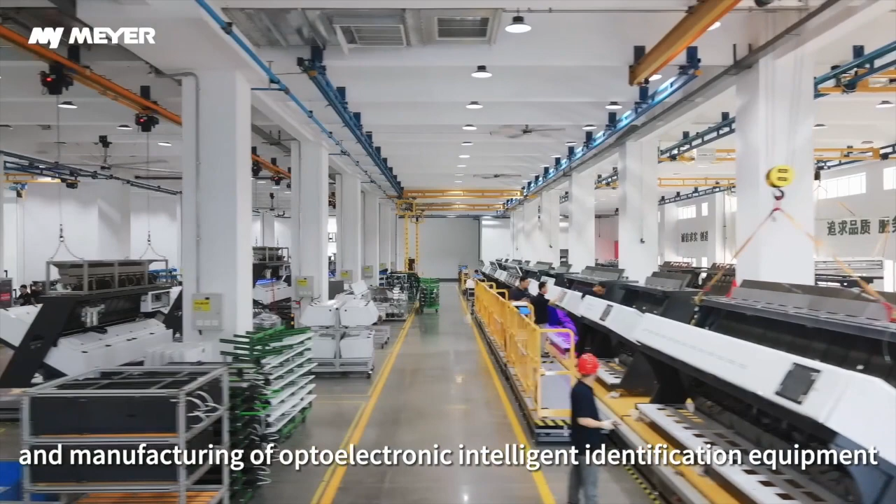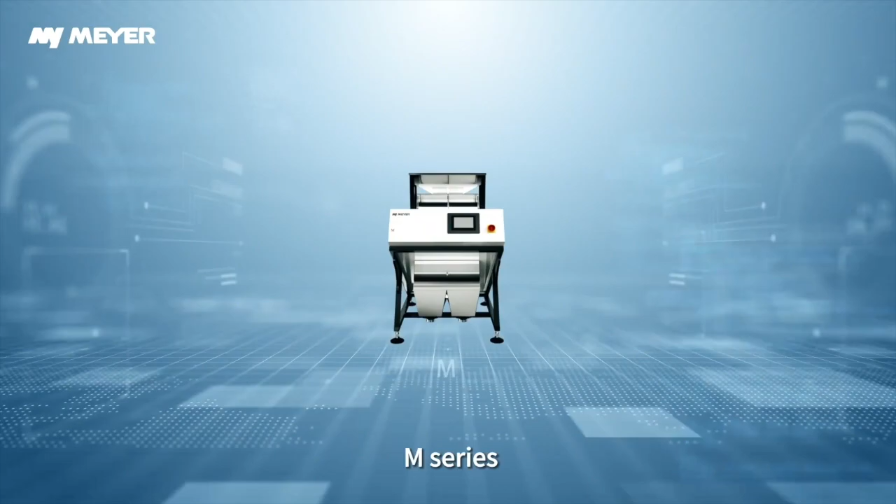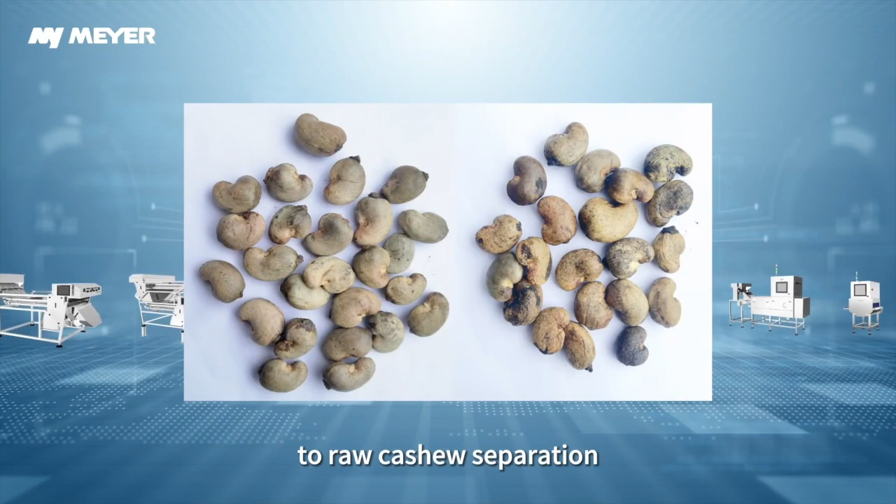MEYER is committed to applying intelligent identification technology to cashew sorting and processing by developing a full range of cashew color sorters, such as CF series, KM series, KF series, KFS3 series, K4 series, KS4 series, CGA series, M series, XS series, XM series, XL series, etc. The whole scene sorting solution can be provided for raw cashew separation, whole cashew separation, split separation, broken pieces separation, testa separation, scorched separation, medium spot separation, shell separation, foreign material separation, and so on.

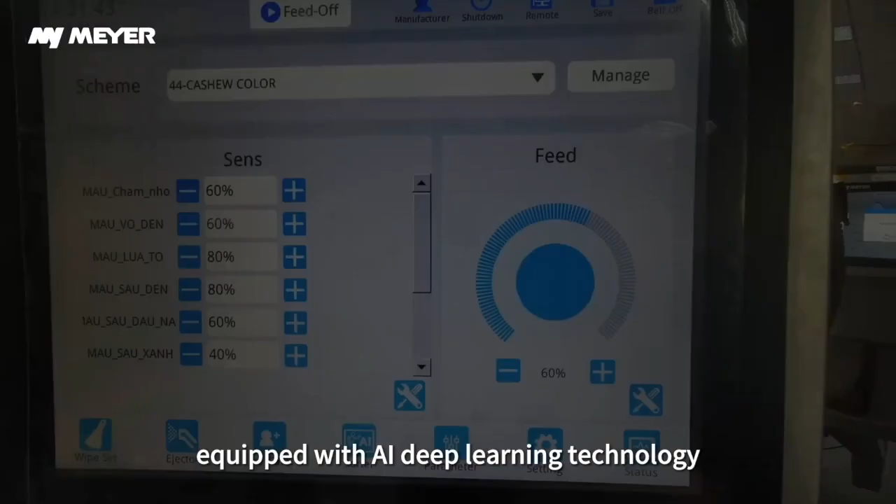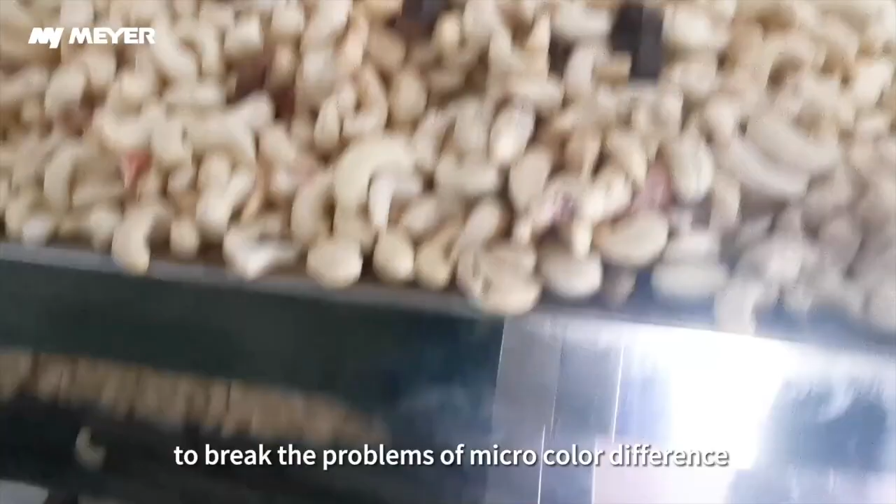MEYER's brand new cashew color sorter is equipped with AI deep learning technology. Based on massive cashew sorting data, it can quickly build and iterate deep learning sorting models to solve problems like micro-color difference, mold and spores, which are difficult to solve with traditional color sorters, significantly improving sorting efficiency for impurities such as single spot, multiple spot, micro-color difference, skin, insect spots, mold and wrinkled skin of cashew kernels.

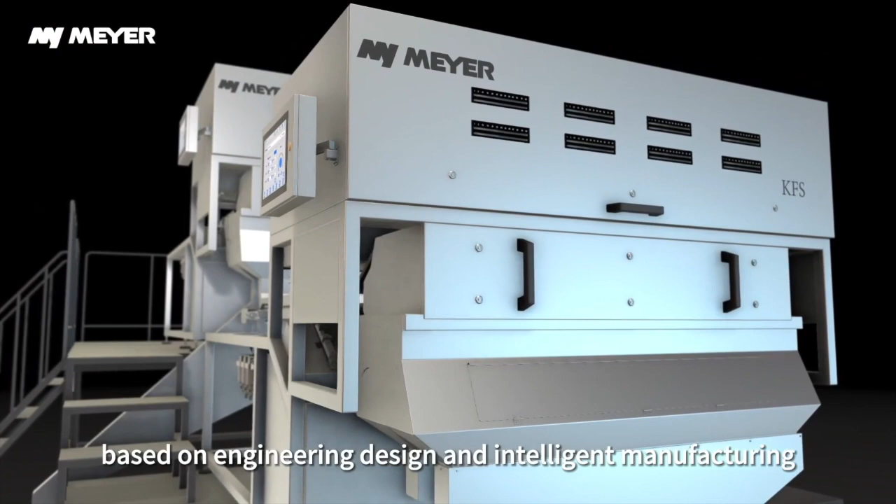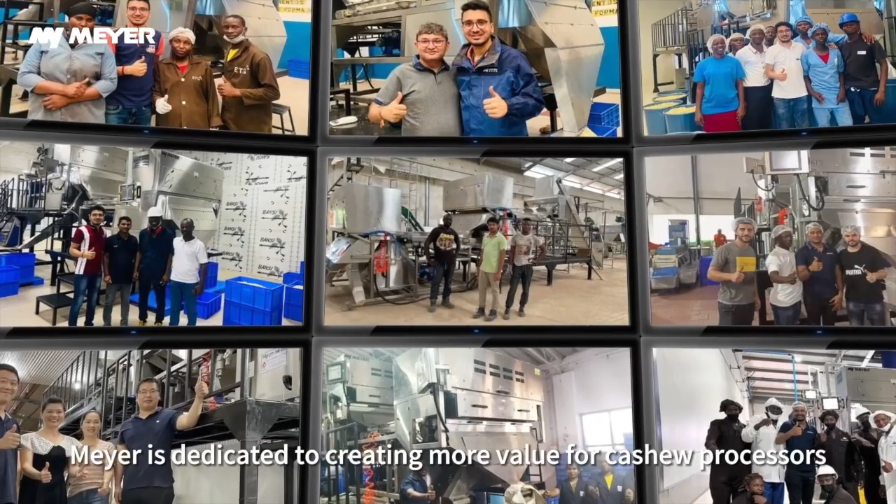Based on engineering design and intelligent manufacturing, the structure of the whole machine is highly standardized and modularized, which greatly enhances stability and reliability. MEYER is dedicated to creating more value for cashew processors.

Have a good stay in Cambodia. Thank you, Joe. Thanks a lot.

Can you imagine one machine replacing more than 250 employees? Sometimes we feel it's not right, but if you see how the industry has grown, how millions of farmers increased raw nut production, almost doubling it in the last 10 to 15 years, then you see the impact is really, really big. I remember when I used to be in processing in '94, '95, doing this job, I used to have 500 or 400 workers, and that's been replaced by one machine.

That was one of the obstacles we used to face to achieve food safety. It's not easy to really achieve food safety certifications when kernels are touched so many times by so many people. We used to have a lot of problems with E. coli because of the touch. These days, it's hard to see any type of claims from the market on E. coli, which is great. Thank you.

Before I invite the other speaker, I would like to ask, can you put on a video from Gayatri Industries? They are also one of the major turnkey suppliers of equipment, very innovative, and each day they come up with a sort of state-of-the-art type of plants. They are from India, and they also have a stall over there. Unfortunately, Mr. Shakti, I didn't see him here today. So let's see the video, and then we'll start with the...

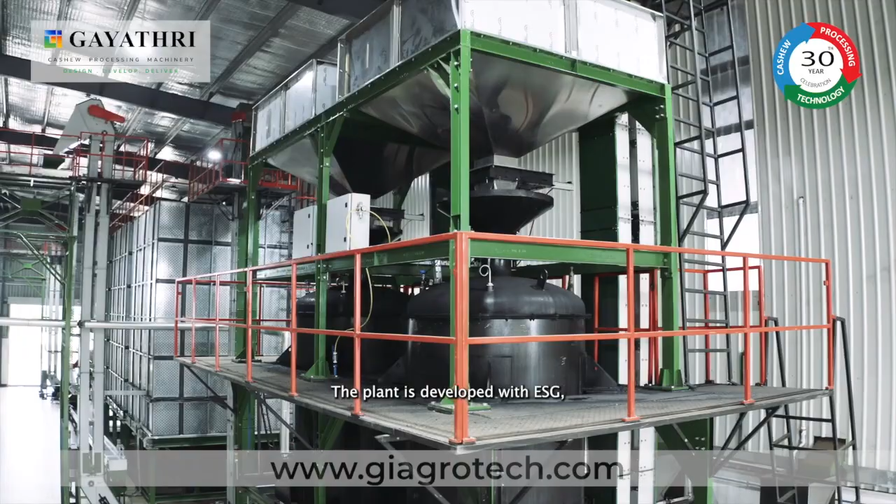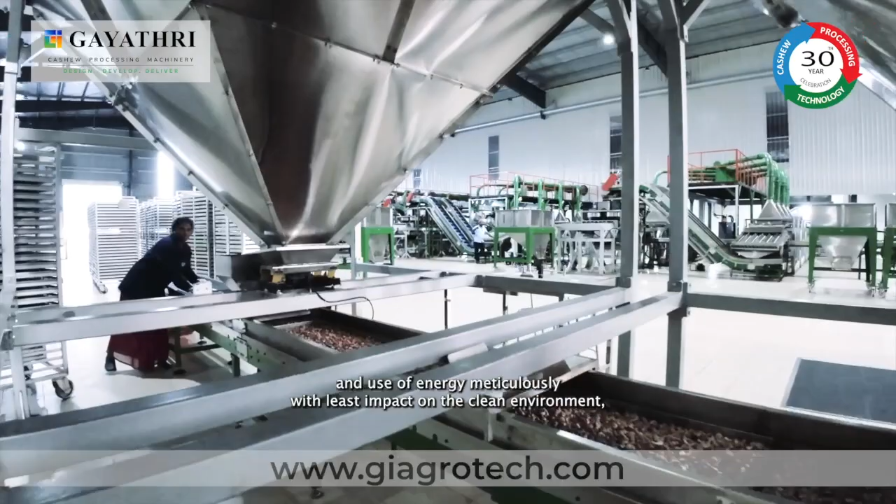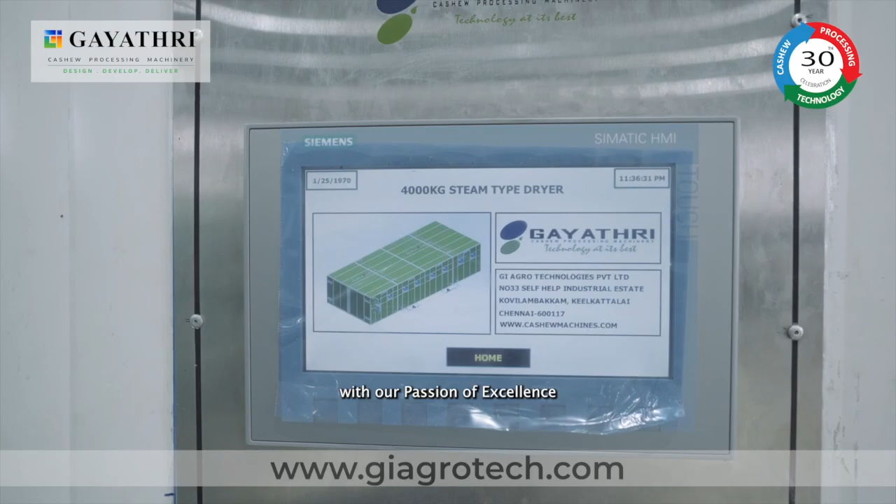Environment: by giving back to nature, air and water, and using energy meticulously with least impact on the clean environment. This is the basis of evaluating an organization's ethical behavioral performance. With our passion for excellence, we have set up a benchmark for the cashew industry worldwide to follow.

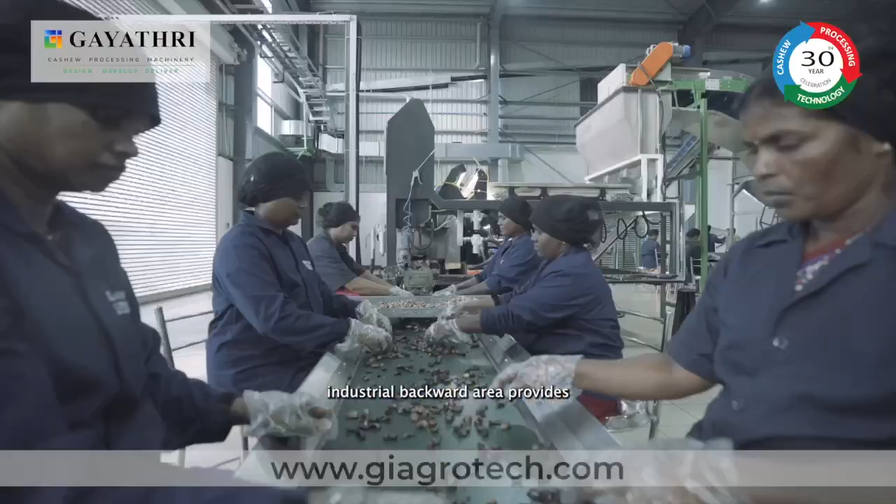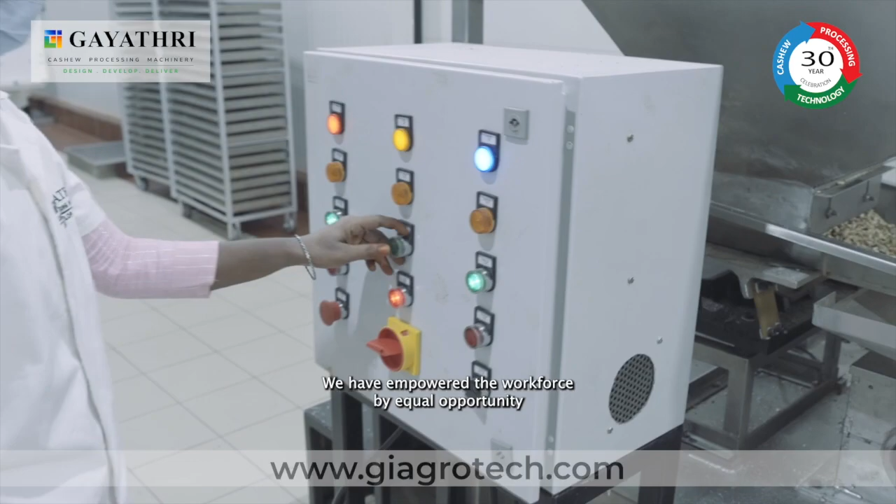Society: the plant, situated in a rural industrial backward area, provides direct employment to about 500 workers, unskilled women in particular. We have empowered the workforce with equal opportunity, training and job skills to become smart workers handling the latest technology in cashew processing, safely and securely.

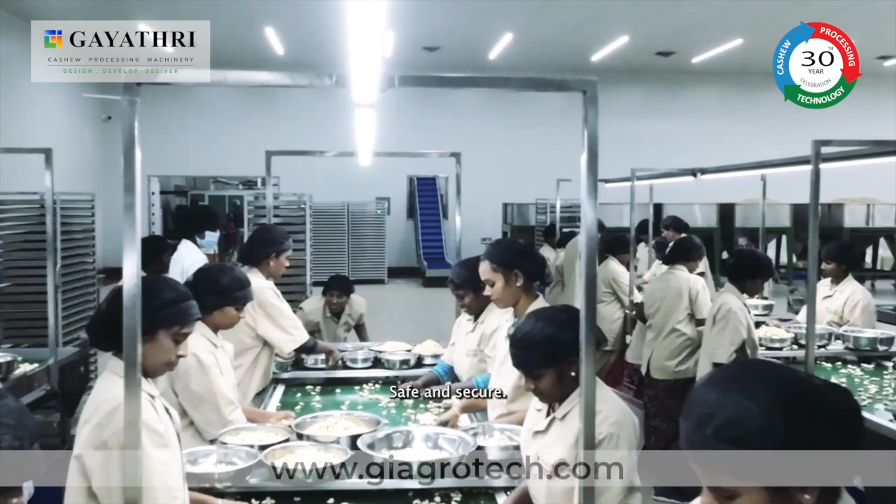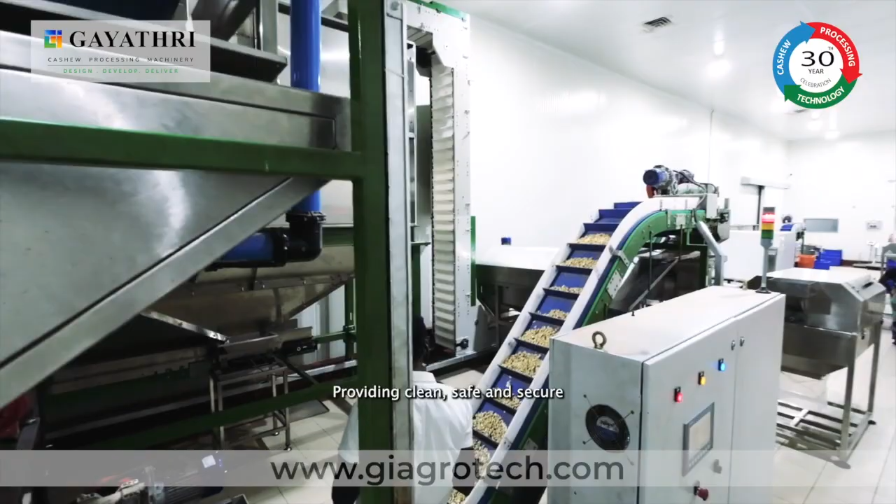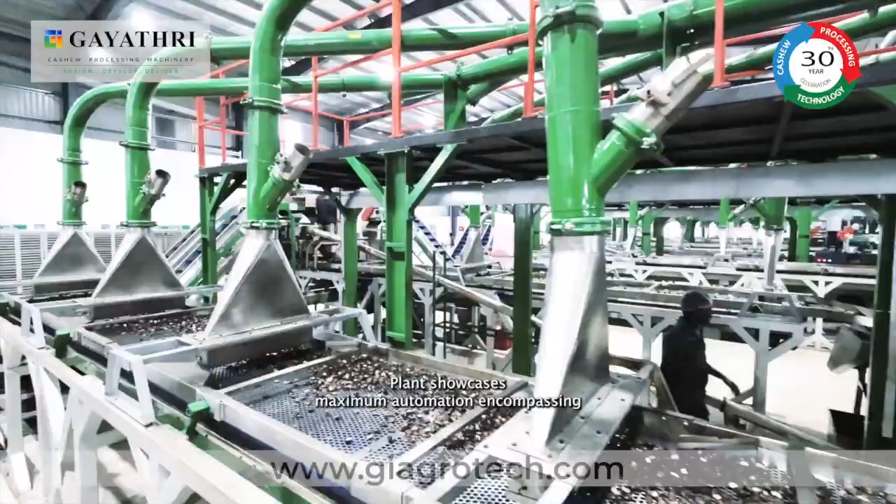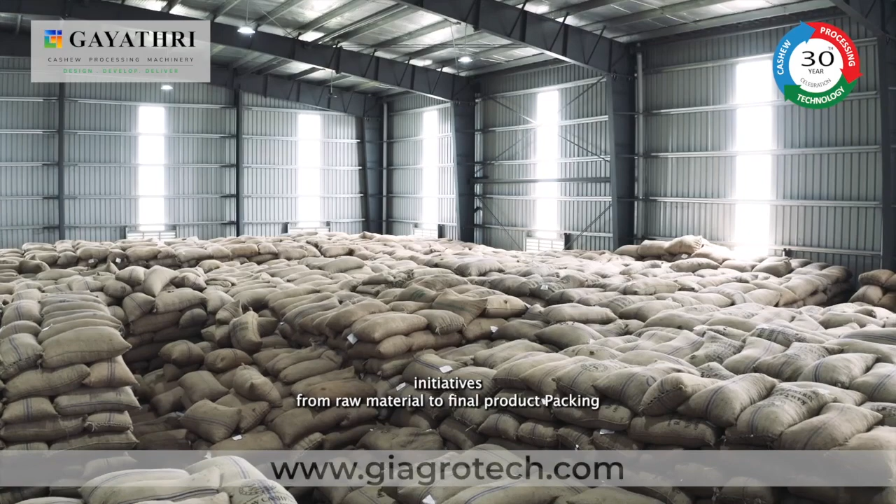Governance: meeting all legal and statutory rules of the government, equal pay for equal job, providing a clean, safe and secure working environment for workers. The plant showcases maximum automation encompassing HACCP and BRC standards, incorporating the latest global food safety initiatives from raw material to final product packing.

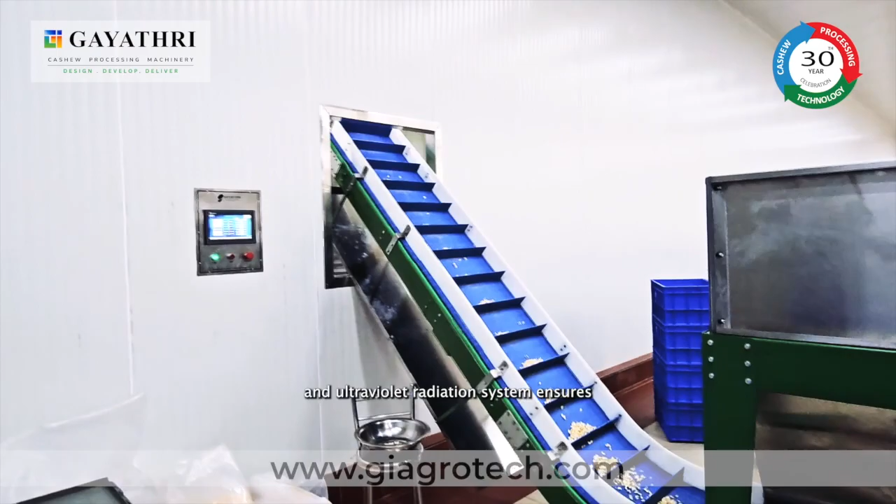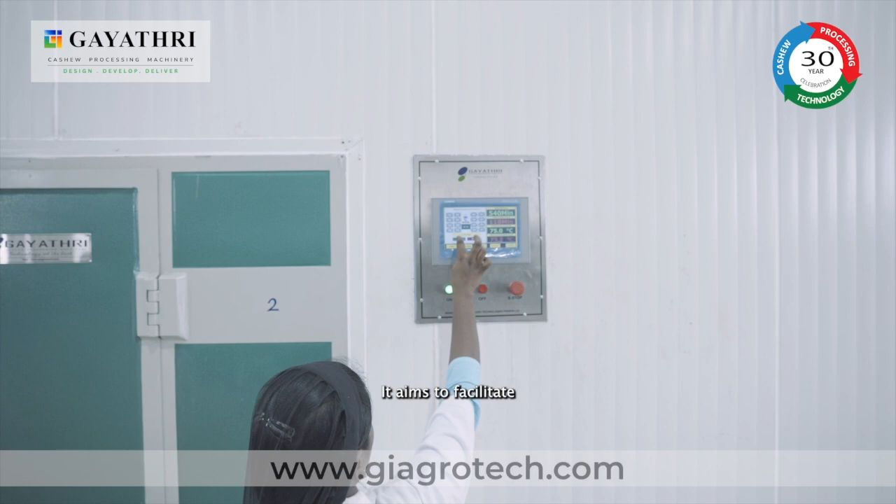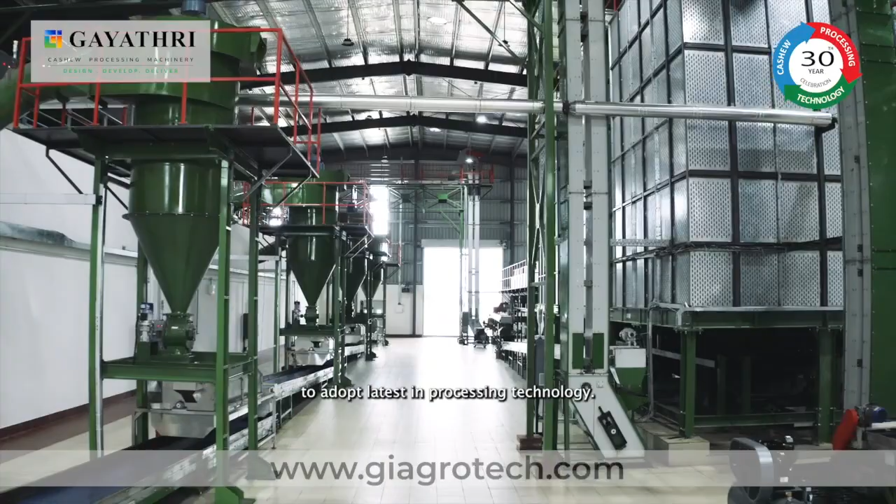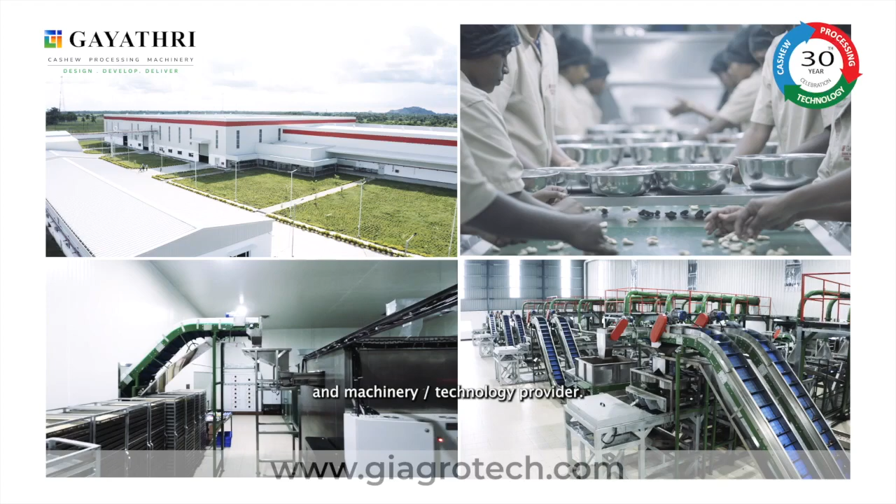This is a specific case where an equipment supplier thought like a cashew processor. The idea was that every day we do a lot of innovations, and sometimes these innovations work wonders, and sometimes they fail. So the idea was that we will not do innovation at the cost of a client. They try to do all the innovation within the plant, improvise their equipment, and only once they are satisfied do they launch that equipment—which is a great initiative.

In the past, the industry suffered a lot with new trials, especially from 2010, 2013 onwards till 2017. There was a lot of new equipment coming in and a lot of new versions coming in, and it wasn't always the case that the purchases were right.

These are the learnings which some of the equipment suppliers took into consideration. It's a great initiative. Now, from a category perspective, they are the champions in multi-grade grading systems. As the scale is increasing, a very normal operation scale these days is 50 tons per day, that's 15,000 metric tons per year, and that's the minimum for any emerging industry. There's still a need for a lot of people on the grading side, but some innovations in the last 7-8 years have seen these two champions bring equipment that cuts down manpower while enhancing efficiencies.

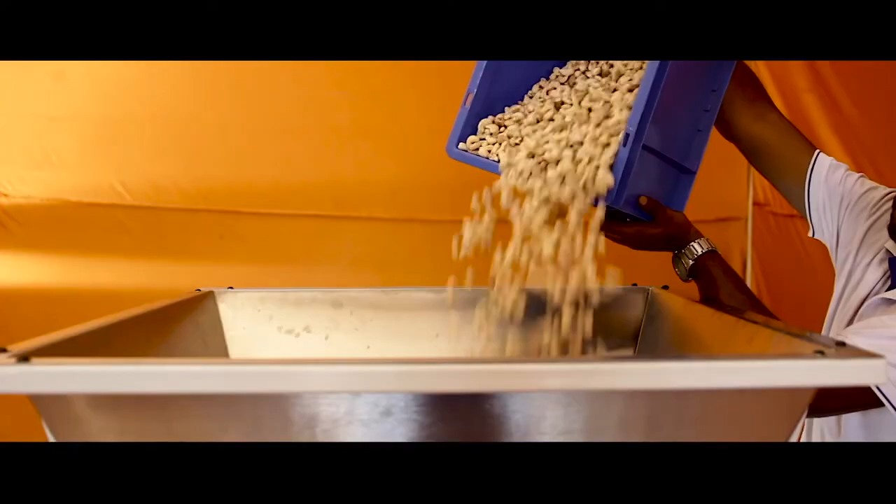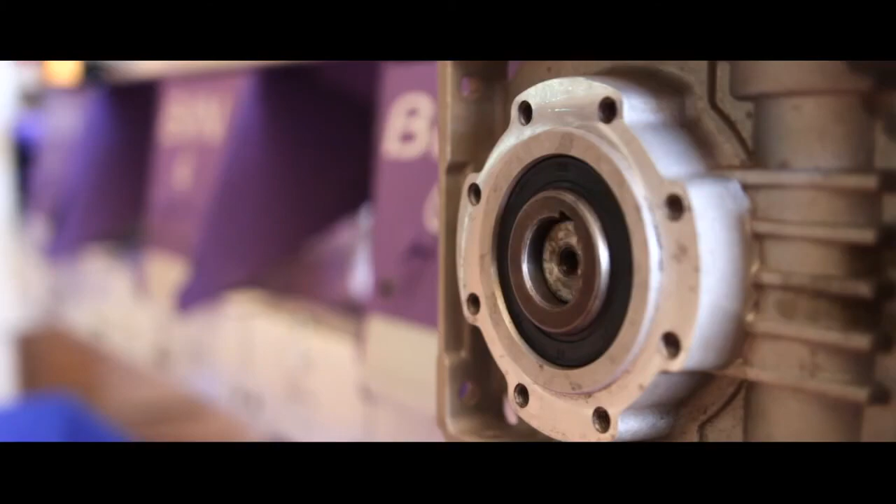As the name suggests, MAYUR is colorful and so is its behavior. Designed with customers' inputs and needs, nanoSorter MAYUR offers the right combination of speed and accuracy. It is powered by NanoVision, an indigenously developed vision technology dedicated to identify cashew nuts by size, color, shape and surface characteristics.

The possibilities with NanoVision are practically limitless, and that's the reason MAYUR gives you the power to grade and export directly from the peeling machine. Yes, you heard it right. Output from the peeling machine can now be directly graded and exported without any further inspection.

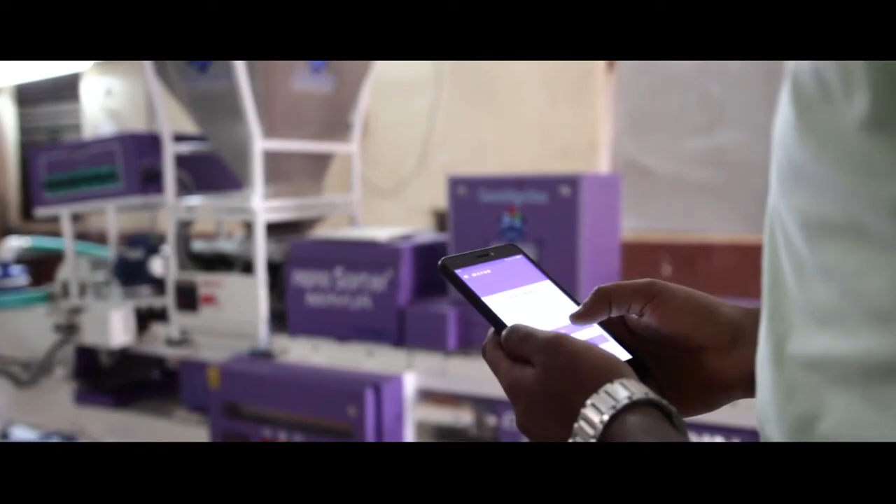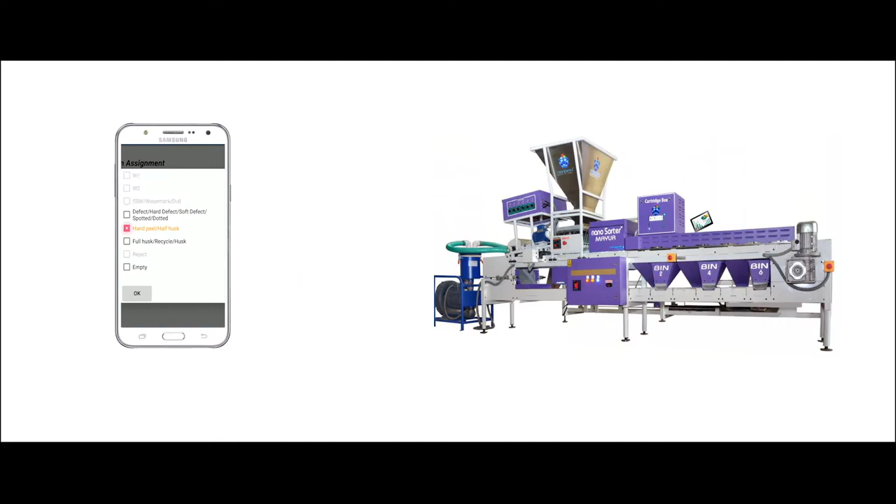The possibilities with MAYUR don't stop at that. You get an Android app with the machine which can be used to set the machine. As a user, you can modify the grades, which will help you customize the output as per your own unique needs.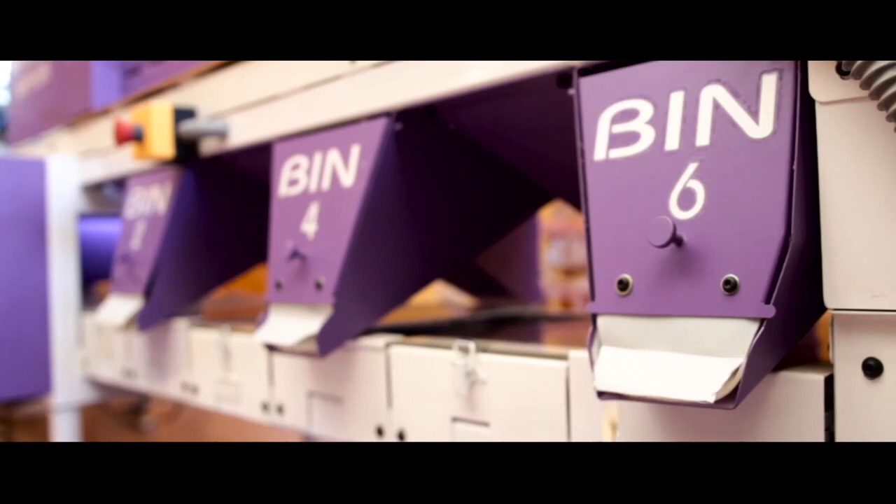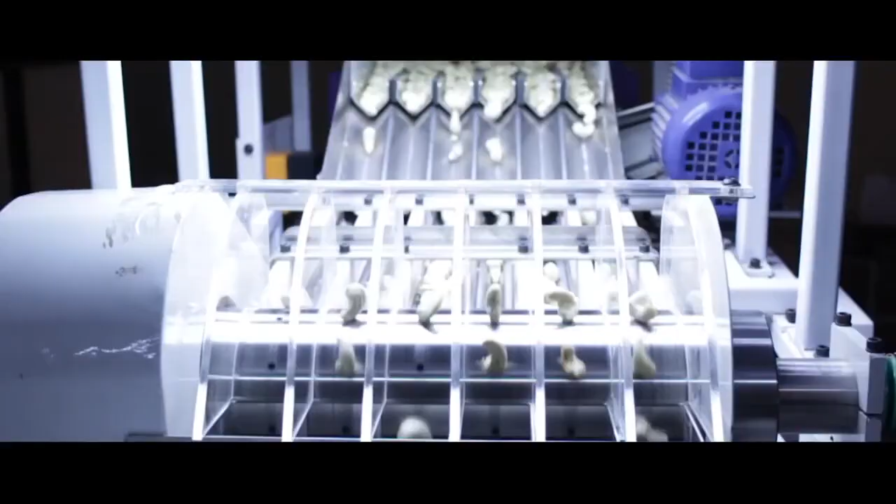MAYUR gives customizable 7 grades for size and color. With 200 kilograms per hour capacity, you can easily grade over 3 tons of cashews per day. The automatic feeding system of nanoSorter MAYUR, powered by NanoVision, helps unassisted high-efficiency feeding of cashew kernels to achieve throughput.

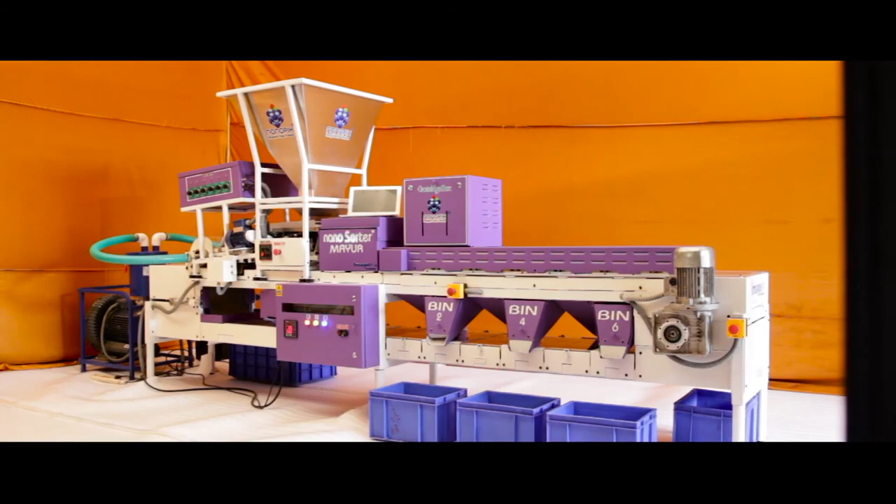nanoSorter MAYUR is truly the next generation grading machine in the industry. No more dependency on labor, no more grade inconsistency. One machine for all your grading needs. nanoSorter MAYUR by nanoPix. Imagine your future.

It's not about replacing some workers on the floor. It is more about providing consistency, providing value to your end customer, creating grades that are consistent across variations in your origin, variations in your processing, and then finally retaining significant value in the highest value bins and getting maximized profit. So the key takeaways from nanoSorter are high value retention in your high value bins, and you get more money for your produce.

We have 1,000 plus customers globally and expanding. 1,400 plus units globally in 10 plus countries, and we have about 12 years of experience doing this.

There are large factories running about 200 plus tons a day, like Arise, Bullock, Olam, who use our machines, and also customers who are very quality sensitive, like Kalbavi Cashews, Kamakshi Exports, Krishibal, who are very conscious about their quality and also use our machines. So it's not just about volume, it's also about quality simultaneously. And that's what we offer.

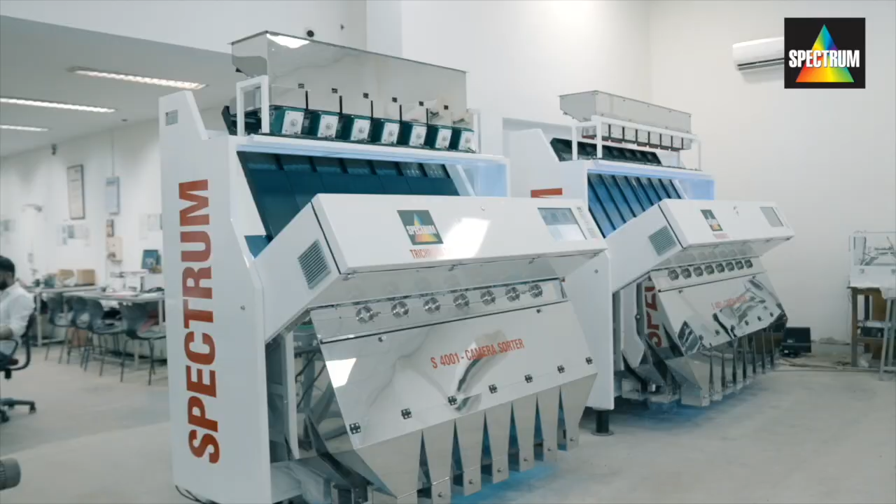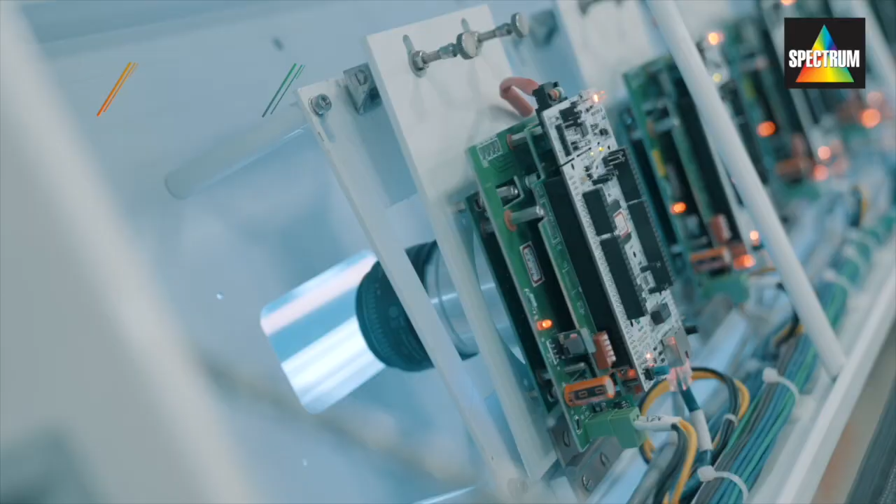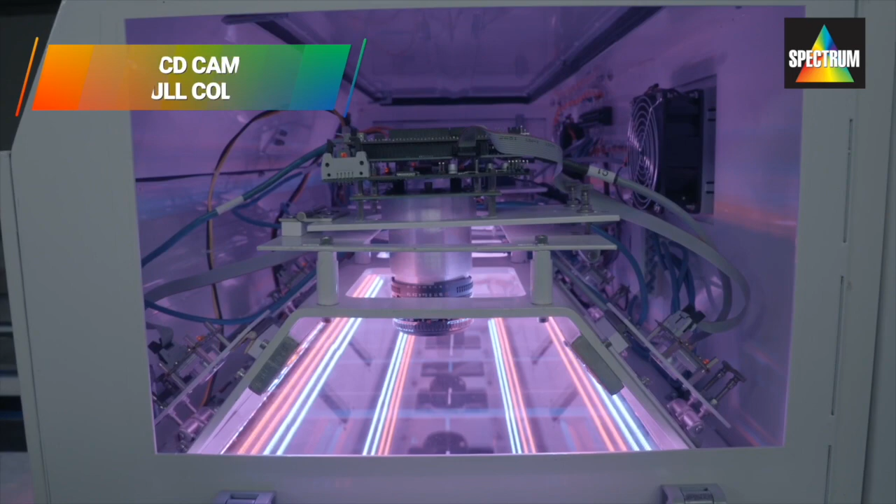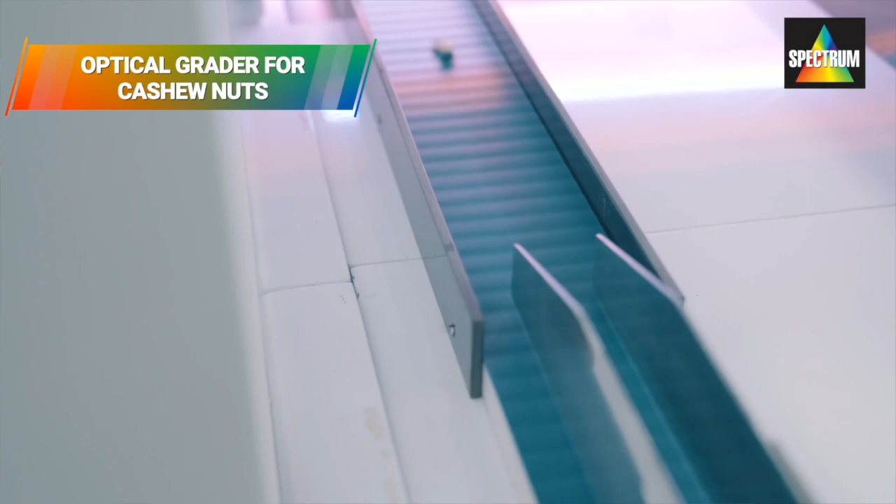Spectrum Industries is an internationally recognized manufacturer of cleaning, grading and color sorting machinery for the food processing industry, with complete commitment towards providing the best of service, value and quality to our customers. We have been the pioneer manufacturers of electronic color sorters in India since 1993. We are an ISO 9001 certified company since 2001 and have been certified for the design, manufacture, and supply of color sorters by the British Standard Institute. Our color sorting machines are also Conformity European or CE certified. We have a dedicated in-house research and development department that spearheads innovation and improvement in machine design, build quality, and performance. Our emphasis has always been on total customer satisfaction, with continuous technological advancement. Today we are the leading manufacturers of full-color, CCD camera-based color sorting machines, of the channel and belt feed type, as optical size graders for products such as cashew nuts, and cleaning and grading machinery for various industries. We provide complete turnkey solutions for processing a wide variety of seeds, nuts and all types of food grains and cereals, ranging in capacities from 1 to 20 tons per hour.

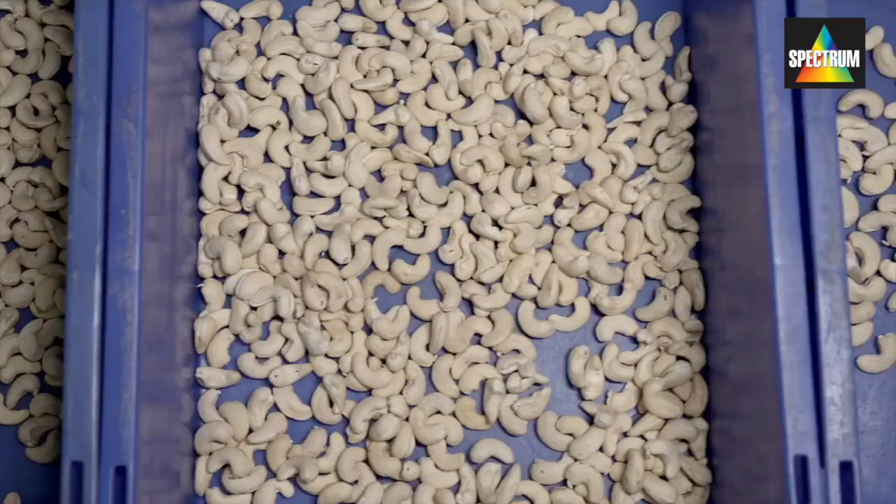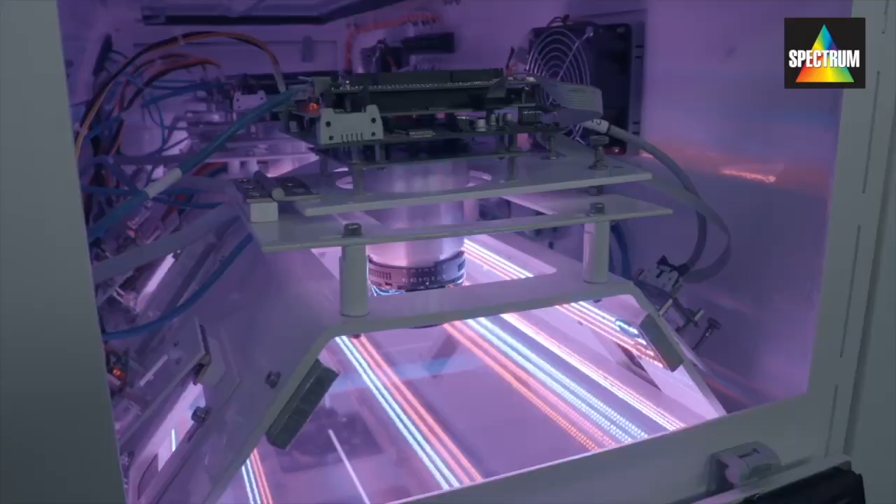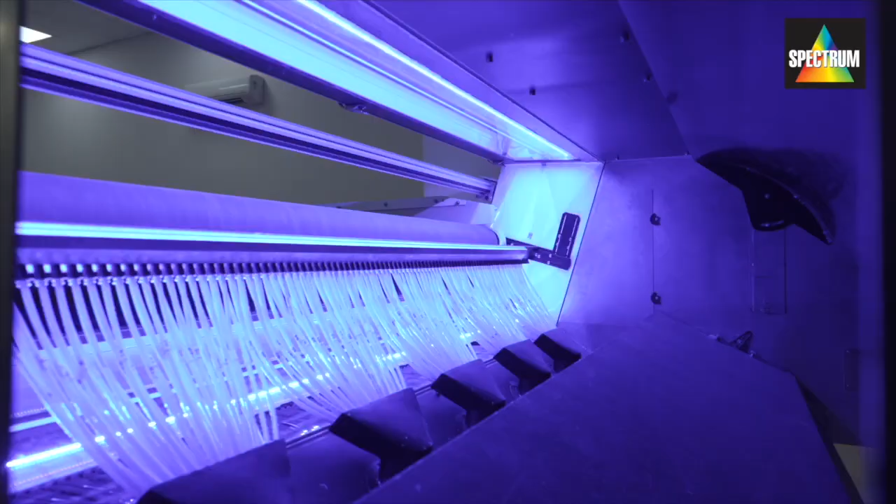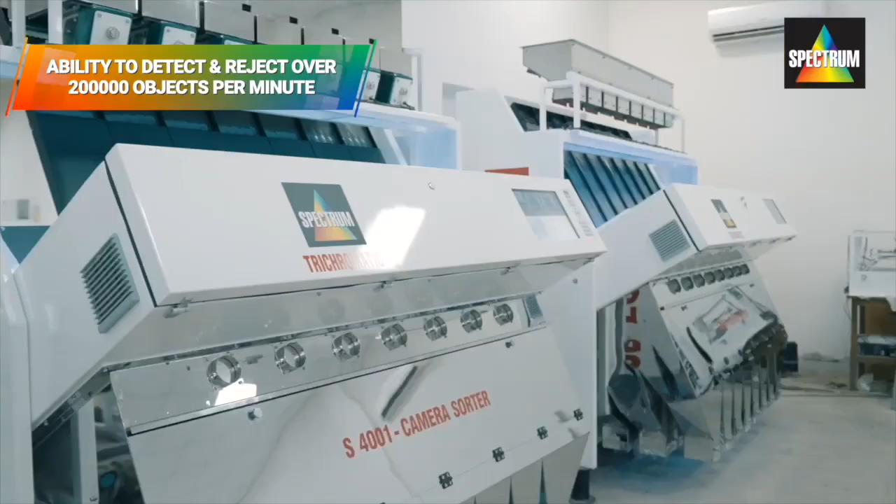The S4001 Maxima is an RGB full-color CCD line scan camera-based color sorting machine, using advanced high-resolution 5400 pixel by 3 trilinear RGB line scan CCD cameras that have a scanning speed of up to 6,000 lines per second. Trichromatic high-intensity LED solid-state lighting is used for sharp lighting of the product, with extremely long life and consistent operation. The cameras scan the product in the red, green and blue region of light simultaneously, in order to identify even subtle defects in product quality. The S4001 Maxima has the ability to detect and reject over 200,000 objects per minute, with a defect size of even 0.025 mm square.

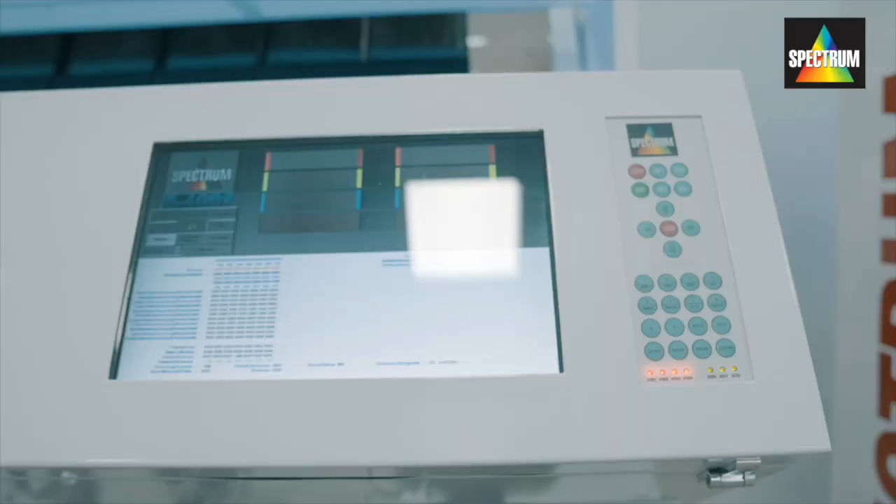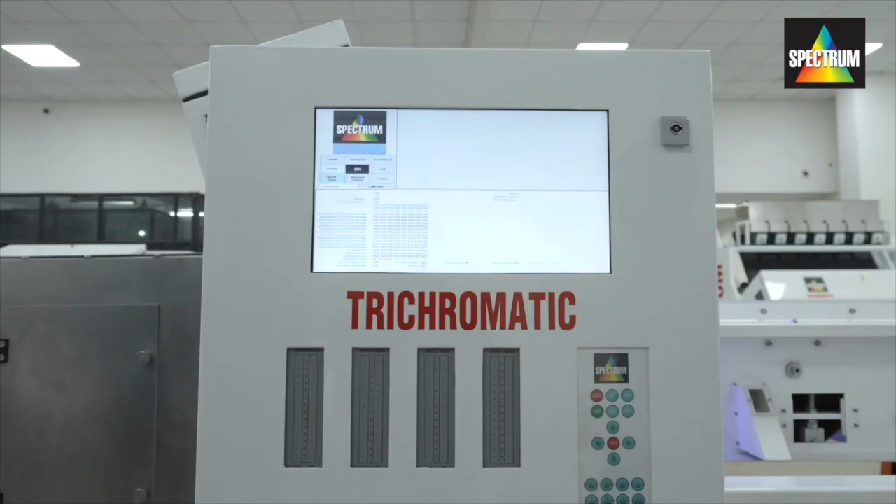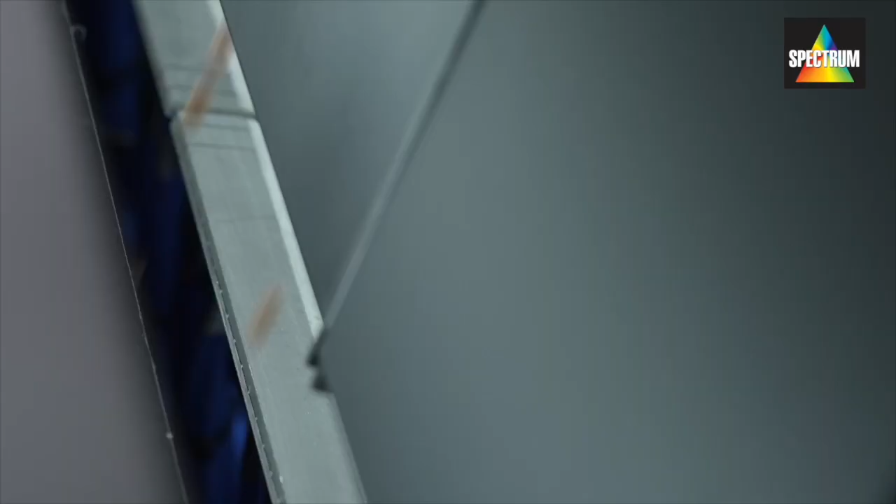The trichromatic LED solid-state lighting provides high-intensity stable lighting, with extremely long life, giving the machine the ability to sort multiple products with ease on the same machine, without any requirement to change the lighting for sorting multiple products. The machine incorporates a color TFT screen, used to display machine parameters and functions, and also the product image with rejection pattern. A complete menu is displayed on the TFT screen for ease of operation and maintenance. At the end of each wiping cycle of the automatic wiping system, triggered at user preset intervals, an online self-calibration system is enabled to recalibrate the parameters so as to maintain optimum performance of the machine. A set of up to 40 user-defined programs can be recalled instantly for sorting various types of products, reducing the setup time required when changing over from one type of product being sorted to another.

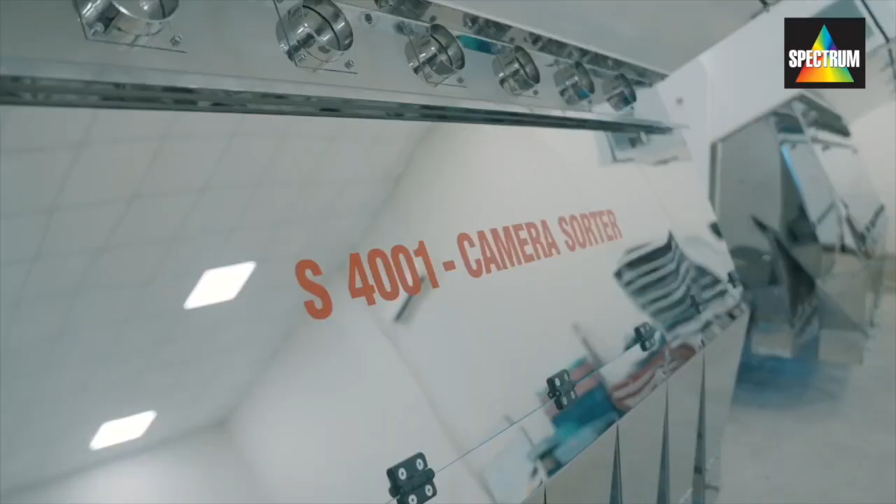All contact parts are made from stainless steel grade 304 with anodized aluminum chutes, preventing contamination of the product and maintaining proper hygiene. The S4001 Maxima can be used for sorting all types of cereals and grains such as rice, wheat, maize, pigeon peas, green gram, red lentils, cashew nuts, peanuts, almonds, sunflower seeds, sesame seeds, and non-food products such as pet flakes and plastic granules.

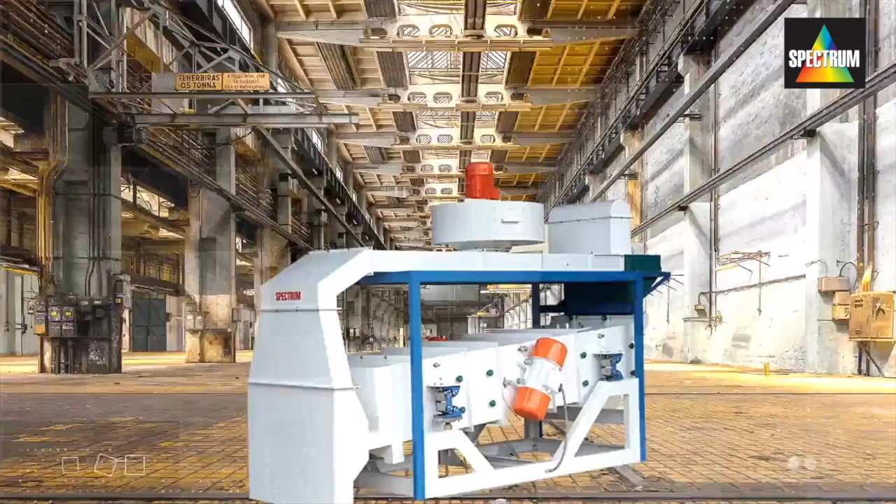Spectrum Industries provides complete seed processing solutions and develops and manufactures specialized equipment for cleaning, grading, sorting, polishing and treating a variety of seeds, grains and cereals such as wheat, rice, corn, millet, pulses, lentils, pumpkin seeds, watermelon seeds, sesame seeds, Niger seeds, etc. The machinery range includes pre-cleaners and destoners, vacuum type and pressure type.

Gravity separators, graders, hullers and peeler polishers, dryers.

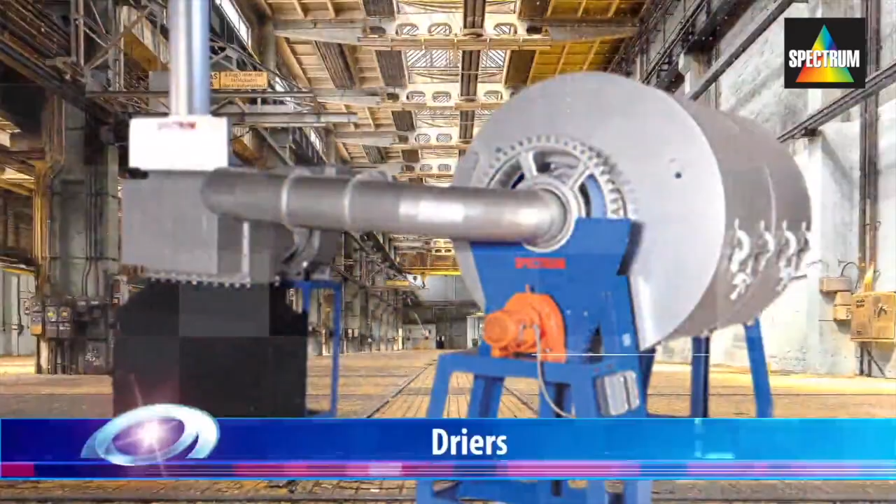The constraint of access to technology for its growth was solved by having an in-house R&D setup, with the best brains working rigorously to develop new products and further improve existing products. The company has grown into an award-winning manufacturing company, with focus on R&D, intellectual property and innovation in manufacturing of machines for the food processing industry.

Hello, my name is Jim Valeris. I'm an almond grower from South Australia, Southern Australia. I have recently installed a colour sorting system that was supplied to me by Spectrum in India. They are based in India, and I am impressed not only with the product and the quality of workmanship and how the machine works, but also the backup support from Jeevan and his team. I invite you to have a look.

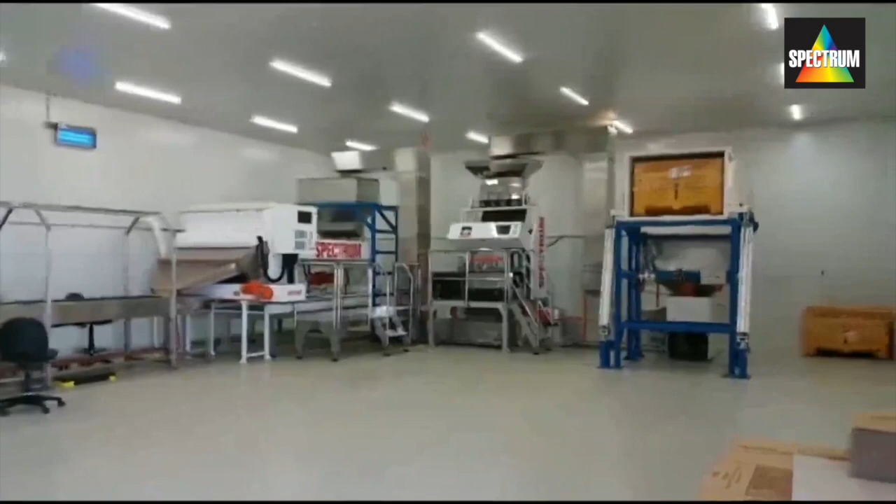Very nice. Why choose Spectrum Industries? Custom designed equipment, tailor-made to your needs, innovative technology, experts to monitor production, prompt delivery schedules, personalized after-sales services, highly competitive prices, complete turnkey solutions for processing coffee, pulses, groundnuts, wheat, various food grains and nuts like cashew nuts, almonds, etc. Over 27 years of experience in manufacturing high-tech machinery for the food processing industry. Choose Spectrum Industries and be assured of complete peace of mind and total support from a very competent team of world-class personnel focused on making you a success through innovation.

Dryers, with also a recirculation of hot air. We have electrical combination too there. They're multi-level, 3-level dryers. And we have the UV machines and the packing machines and the whole range of other machines that we have for the other industries.

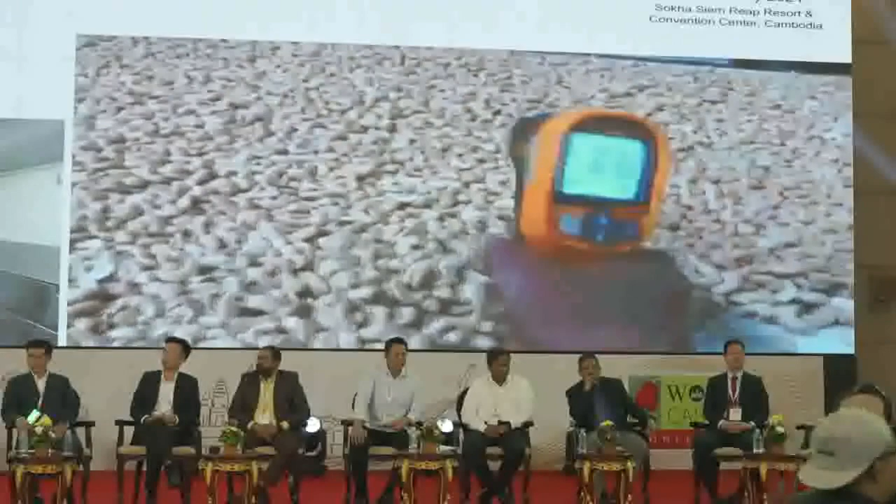This is the inlet point of the cooling conveyor belt. This machine runs automatically and can be monitored as long as you have an internet connection to the machine. You can see the state of the machine, any malfunction or speed, everything you can check online.

This is the outlet point of the kernel after going through the cooling conveyor. The color is unchanged at this temperature for the fumigation purpose. As you can see, this is the temperature before packing the product.

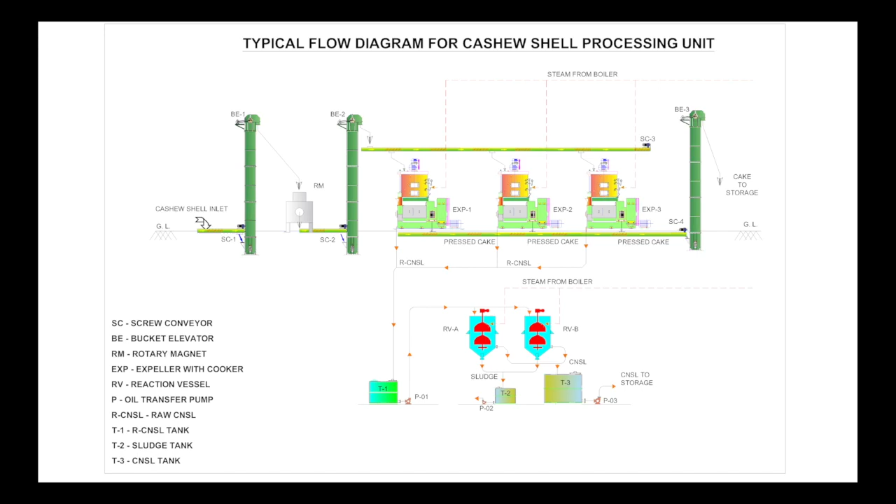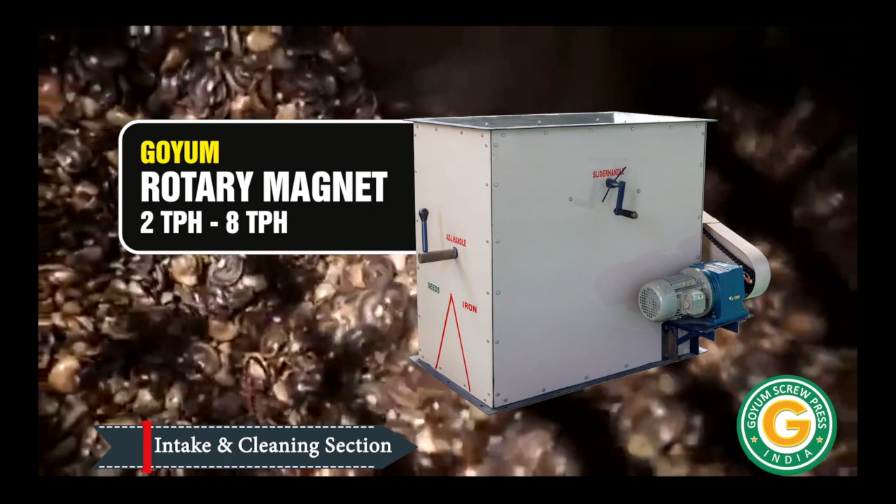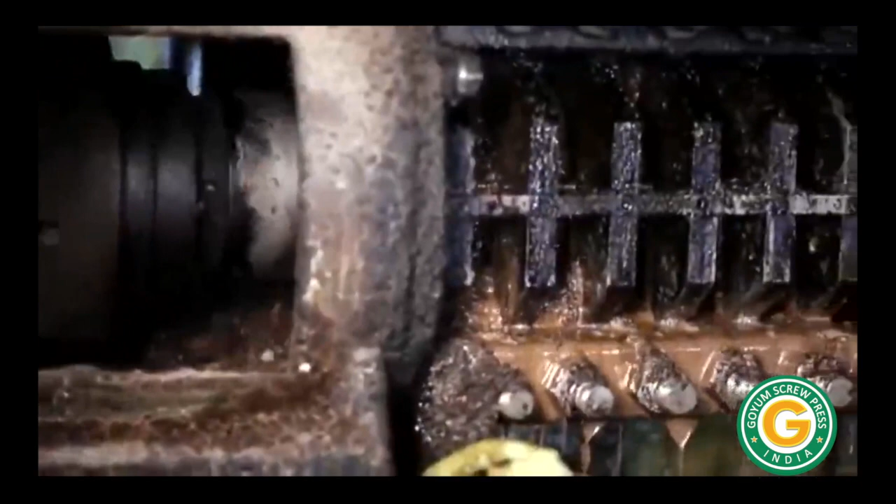Welcome to GOYUM Group. Here is a glimpse of the GOYUM cashew nut shell liquid extraction plant. We will walk you through the different stages of the CNSL extraction unit. The first step is the cleaning section. The shells pass through a rotary magnet, which automatically separates all metallic impurities. Now the clean shells enter the conditioning section, where they are conditioned using indirect steam from the boiler. Once the shells are conditioned, they enter the pressing section. GOYUM offers a variety of presses for CNSL extraction, ranging from 15 tons per day to 35 tons per day.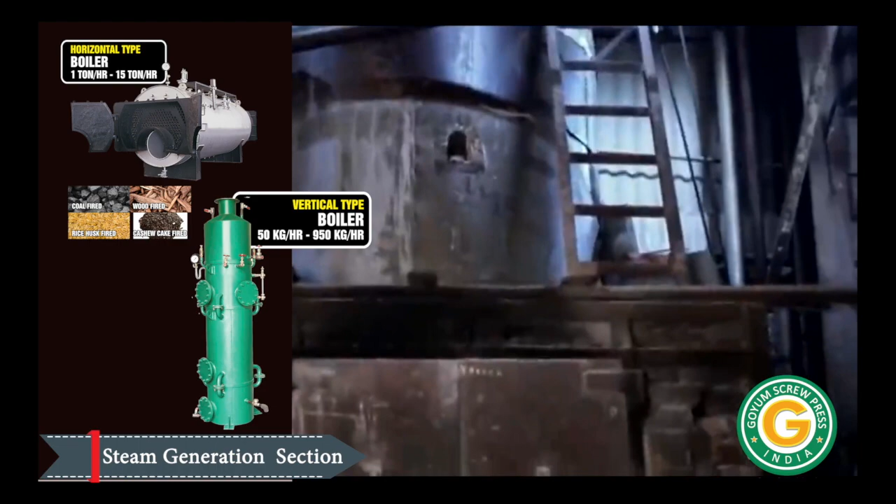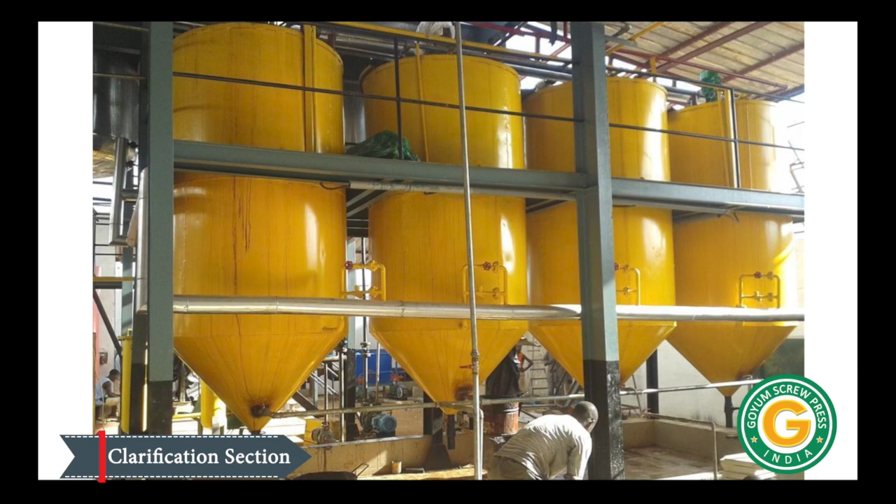This is the steam generation section. The pressed cashew shell cake is sent to storage and used as fuel for steam generation. GOYUM offers both vertical and horizontal boilers on multiple fuels. The raw CNSL is pumped from the underground tank to the reaction vessel, where it is heated using steam and allowed to rest to settle the impurities. These settled impurities are drained out to get clarified, treated CNSL.

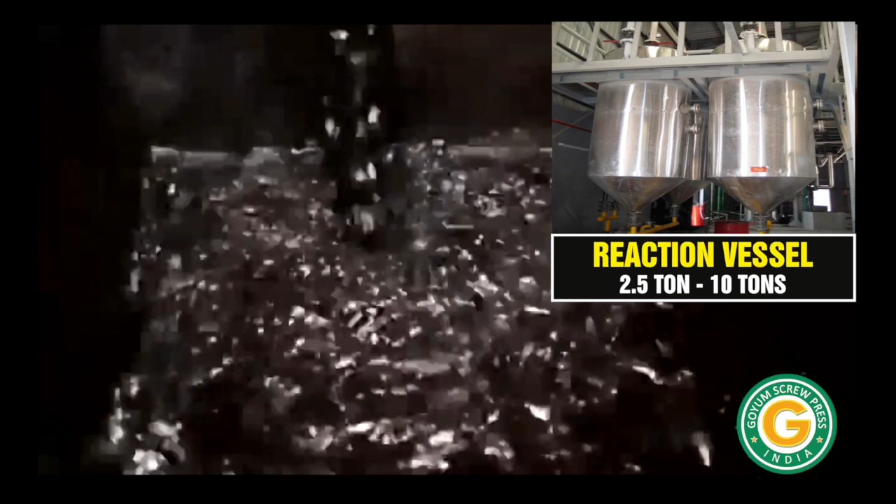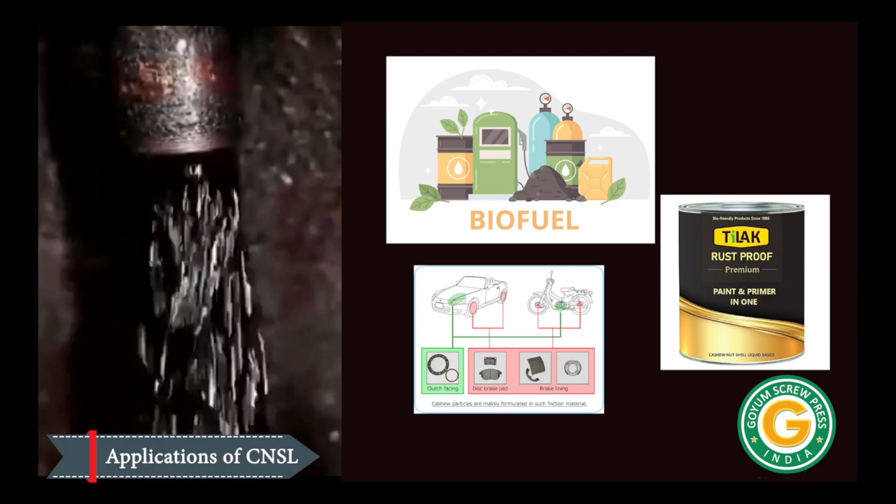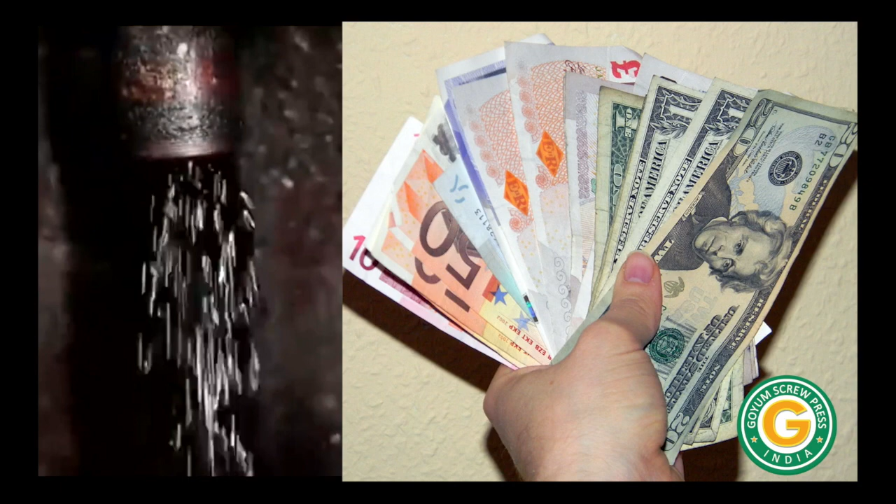Applications of CNSL: it is widely used as a biofuel for diesel engines, and also used in friction linings and as an anti-corrosive coating in the paint industry. Applications of cashew shell cake: it is widely used as a soil conditioner, as a growing medium, and as biomass briquettes for combustion. You can generate excellent wealth using CNSL extraction in collaboration with GOYUM. Now you can view the capabilities of GOYUM.